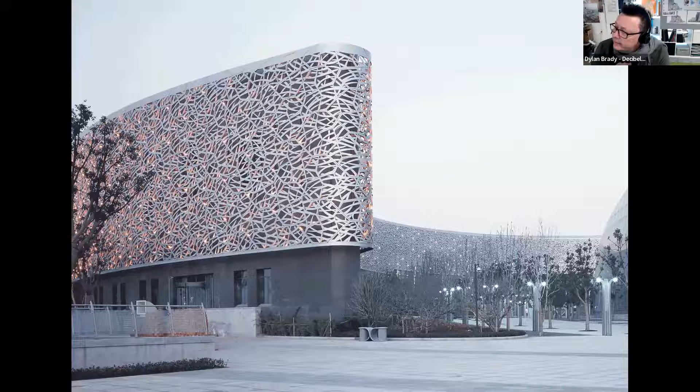Nick and Virginia have spoken very highly of quite a lot of the projects that we've done through China over the years. We started working in China in 2008, and in 2008 we won in an international competition the facade for the new Suzhou Science and Cultural Arts Centre. I'm not going to go into very much detail on any of the previous projects other than to give you a little bit of context around perhaps the shifting emphasis of international design and its role in China and the way it works.

We started in China very much on a hyper aesthetic kind of super rationalized cultural brand, if you will, creating identity, creating places, differentiating cities that could otherwise be lost in a homogeneity. And this Suzhou Science and Cultural Arts Centre really set the bar for us and for a number of other projects around creation of an identity using a very simple but detailed and complex relationship between patterns and lines.

Our team here at Decibel is deeply multicultural. We hark from not only Southeast Asia but Europe and beyond, and we work together in a building that we were lucky enough to design for some future person who would be highly blessed. This is the Pixel building that I'm in today and that we use as our headquarters. It's located in Melbourne, and it was built and designed in 2006, completed in 2009. It's a demonstration green building, and we're getting quite good at doing these.

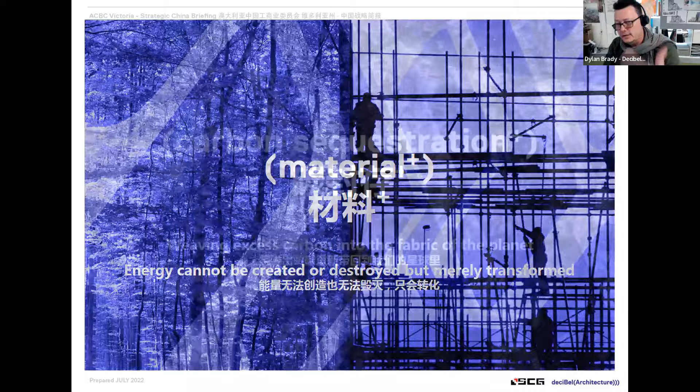And then obviously this idea of sequestration or embodiment. How do we make sure that we weave the excess carbon that's currently in the air back into the fabric of the planet? How can we actually own it and control it and take it out of circulation from the parts per million? And then of course, people. We are all people in nature, and it's the nature of people that sometimes really pushes us.

As with all projects that we've done in China, you go through a lot of versions. There's a lot of minds to keep happy. There's a lot of agendas at play. I'm going to show you now a slide that takes you very quickly through the panoply of opportunities and options we went through. But remember, inside each one of these versions is actually exactly the same engineering and parti of architecture.

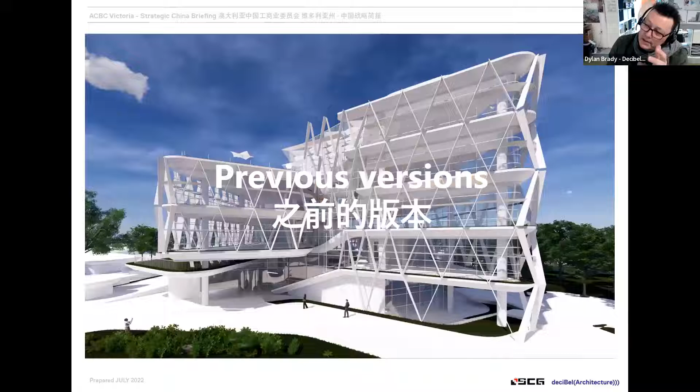So in these previous versions here, you see that there was a competition, a version, another one, all these different opportunities looked into and studied in order to come to a place where we felt that the client was finally at a point where we could get the government and the planning authorities over the line.

We have workers coming to the building, we have visitors, we're using energy, we're using water, we're pushing water out. Our idea was, if we could think about this project as a part of the context and not as a single site, we would be able to better explore and explain how the urban design principles that are very well understood in China, like linear parks and connectivity between areas and identities, could be woven into the story of this building.

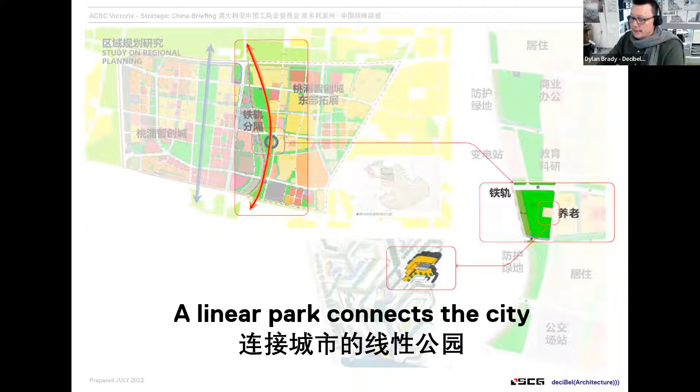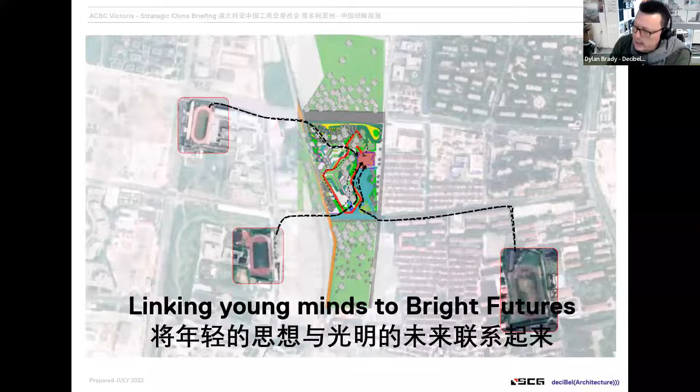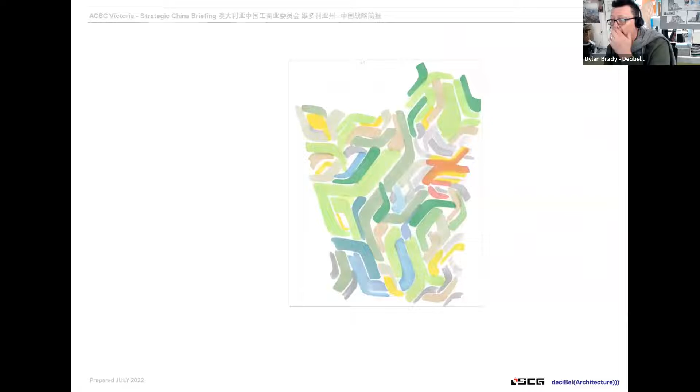So this idea of ecological complexity, of this woven landscape, and of coming back to these ideas of journeys was really something that drove us to think about this as almost a painted landscape. And there's thousands and thousands of years of tradition of incredible gardens and journeys and quite highly structured landscape metaphors and allegories that are in the Chinese mind and in the Chinese history. Suzhou, where we did that original project in China, has 98% of the World Heritage List of gardens in the world inside this tiny city.

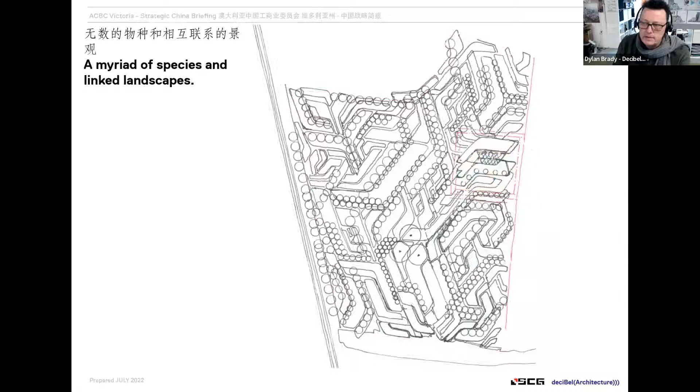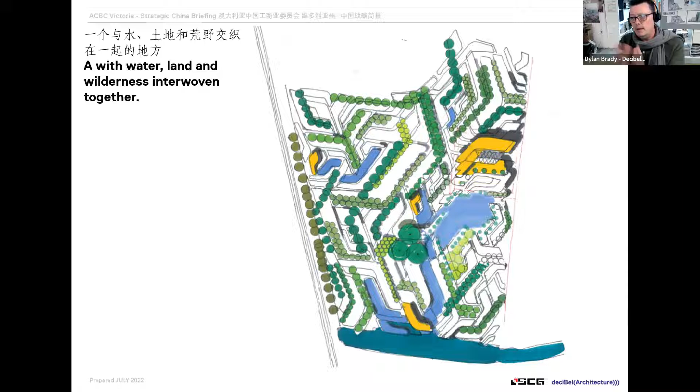For us, that painted landscape really drove us to thinking about how do we create this interwoven, overlapped, and ultimately living ecology that would be inspired by the scale and the journeys of those Chinese gardens, that we could bring a myriad of species and linked landscapes together. So with water, with land, with wilderness, with farmland, with cultivated and wild planting, we'd be able to draw together really an overall strategy. And we thought about our project, this larger project here, as being simply an enhancement or a focused expression of what we were doing there.

At each stage, when you're working in projects like this in China, you need to make sure that your idea can become the client's idea. You have to be able to translate that idea in a way that ownership of that idea transfers, and that takes courage. You need to be ready to let your idea go, to let other people participate in it and actually understand how it's going to grow.

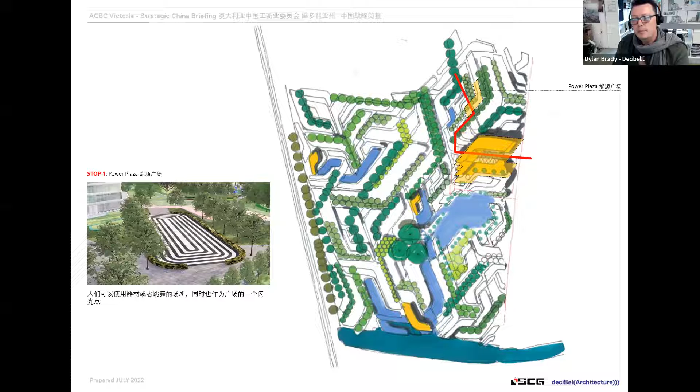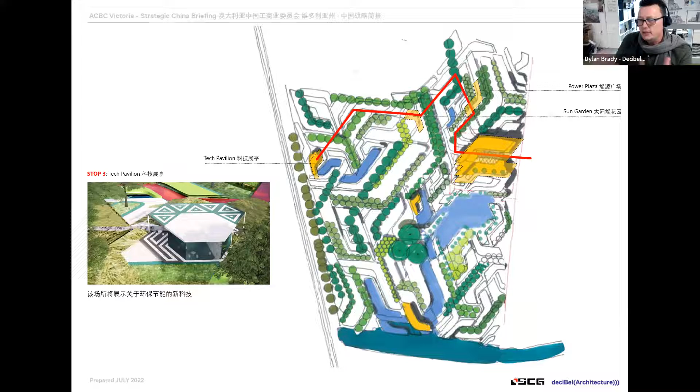So we imagined here a simple loop through this park that would let us bring people through a series of 7 pavilions. There was a power plaza where we were going to be able to tell children, dignitaries, family members the story of energy and solar power. A sun garden that then looked directly at solar power rather than necessarily geothermals and hydropowers and the like. We're looking then at a tech pavilion. How do we utilize data? How do we gain data? How do we measure the data from this park and the filtration of water that's going on inside it?

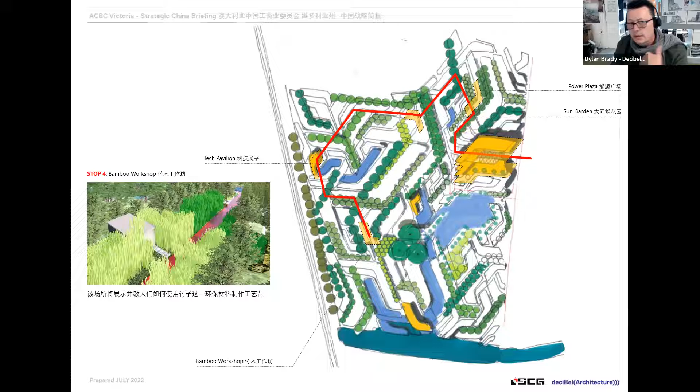A bamboo workshop. Bamboo is one of the most incredible rapidly renewable materials. It has a deep, deep history in China. There's a massive amount of it in the cultural and construction industry over there, and far from seeing it as an olden day tool or material, like that unsophisticated bamboo scaffolding, we were really pushing to see how we could use those older, rapidly renewable materials, the crafts that we used with them, with the current CAM cutting and digital technology of lamination and material sciences, to make sure that bamboo has a role in the future.

A water resilience garden. We had the great opportunity. This site and this park is located along the Honglei River. Now, river is what it's called. Drain is what it looks like. Our job here and the function of this whole park and project is ultimately to clean that waterway. So we take water out of that waterway and we push it through all of our reed bed filtration gardens and put clean water back into the river, and we explore and explain and educate people about how that works as we go through it.

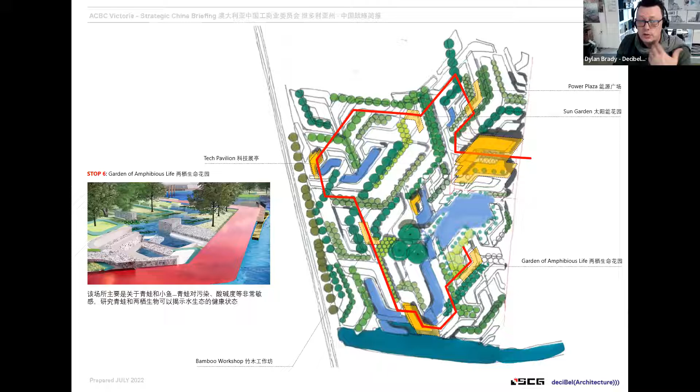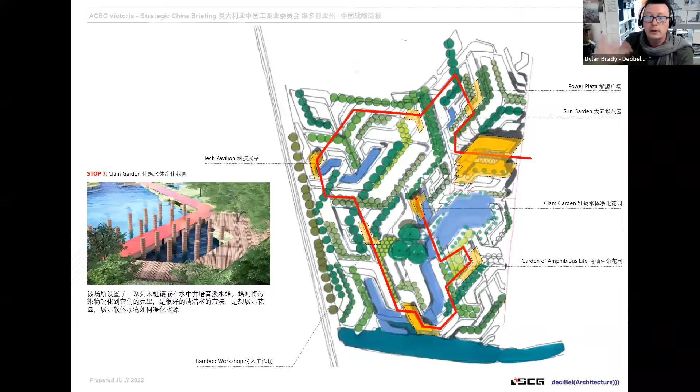That water story leads to a story for a garden of amphibious life, where we start to talk about frogs, and we talk about all of the creatures that live in water and how they live in water and how that psychology and ecology works, and actually train people to stop thinking about water as a drain and start thinking about it as a haven. And from a haven of aquatic life, we wanted to put in a clam garden where we actually had a productive garden growing clams that were doing two things. They're both filtering water and they're also providing a food source, if not for people, then for the environment and for birds and other creatures in the space. And ultimately leading through to our building as the world's greenest building.

Pixel has got 105 points out of a possible 110 in LEED. This building has been designed at this stage to achieve 108 points in LEED version 4. WELL version 2, 100 points, and I don't want to get too deep into the detail here because I don't know how many of you are au fait with all of this, but I can assure you there are thousands and thousands of pages of this stuff, and most of it would make your eyes water.

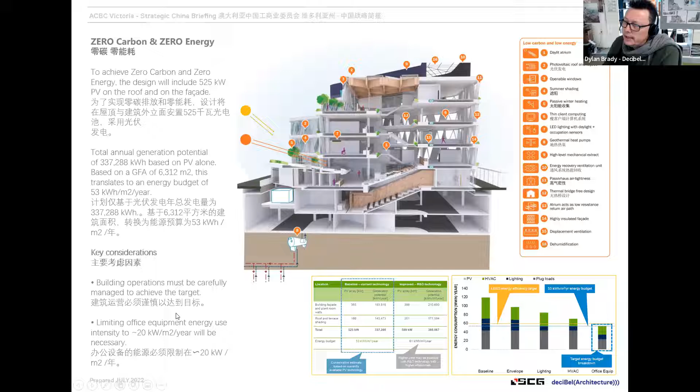So in order to work to an energy budget, you have to make sure that you're essentially trying to understand how you're managing the energy use on site, and obviously tailoring it to that. And I'll get into a little bit of that in a minute. Zero water is a critical element there. Zero water here being, we wanted to be able to harvest rainwater captured purely on our building to fund our building. We've done it here in the Pixel building, on a very, very tiny site.

We're at about a 240 odd square meter site here, and we've got more like a 1,000 square meter site there. It's about making sure that you catch as much as you can, but that you use as little as possible, so we're using vacuum toilet systems. We're using a lot of grey water treatment systems. We're returning water, as we have to in quite a few of the rating tools, to the environment cleaner than when it landed on our building, and lots of measurements and water consumption strategies. It affects the way that you use your energy systems, because you don't use water in your cooling towers.

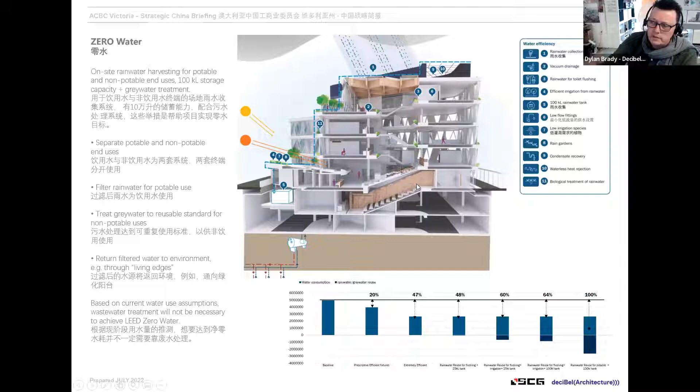You need to use air chillers rather than water chillers, and there's a lot of kind of components to that. But a big part of it is also making those stories visible to the occupants in the project.

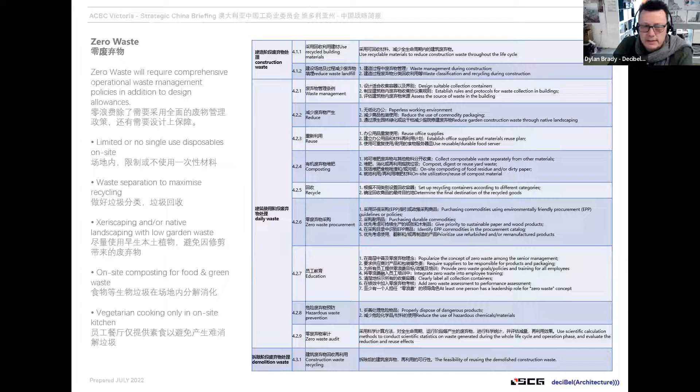Zero waste. Zero waste, I think, is a tool that has quite a lot of room to grow. It's still very much about making sure that you send what you don't use to the right places to be reused. We've really tried to make sure that the building and the construction company that is building it understands that we need to offsite as much as we can, so that that control on waste is much more sophisticated.

Absolutely having no idea how long we're into this, but probably needing to get a bit of a wriggle on.

This is a view of the building. It's developed a little bit from here because, you know, these things happen, but this is what we've got approval to share at the moment. And so you can see that this building has got a series of quite articulated triangles on the facade, and I'm going to talk about the facade a little bit here because it's such an important part, both visually and also at an energy and information level.

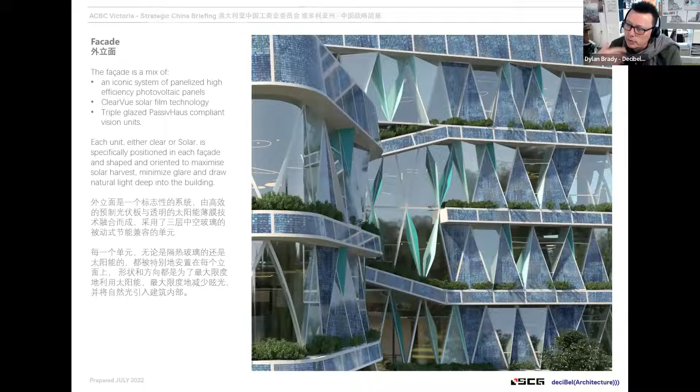The facade is really a mix of solar panel elements built into these triangular frames, of triple glazed window units, essentially ensuring that we have a clear thermal line to the project. And we've, in those clear units, included a ClearVue film, which is a solar film generation, trying to obviously test and explore the technologies that exist today and push them to the limits of where we can go.

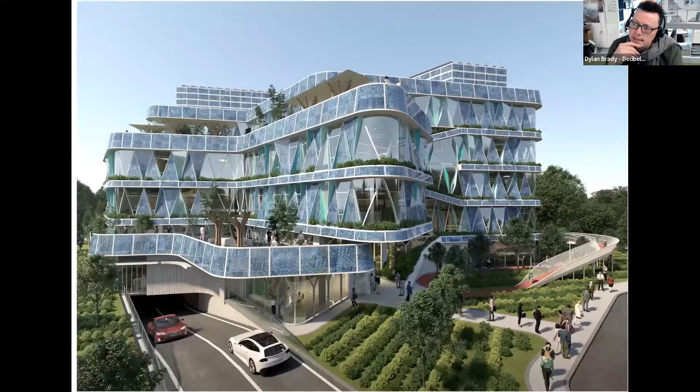What's interesting in the facade is that there's a series of competing requirements. We know that we need to maximize the solar energy that we're gaining off that facade, but we also, in order to score all of the points that we have on indoor air quality and indoor environmental quality, need to maximize the daylight penetration into the project and into the building, and also maintain connection to nature and views to the outside.

And so what we did was, in generating this idea of the triangular facade, we were able to make sure that the upper elements, the triangles that have their base at the top with their peak at the bottom, were all dedicated to daylight, and that the triangles with their larger section at the bottom and the peak at the top were all dedicated to solar. And we were then orientating those so that we would harvest and capture the maximum amount of light possible.

We had very strict controls on our window to wall ratio, and that obviously drove some efficiency and some need for solar and daylight performance. But what we found overall is that there were a number of panels that started to perform really substantially better than other panels in their orientations.

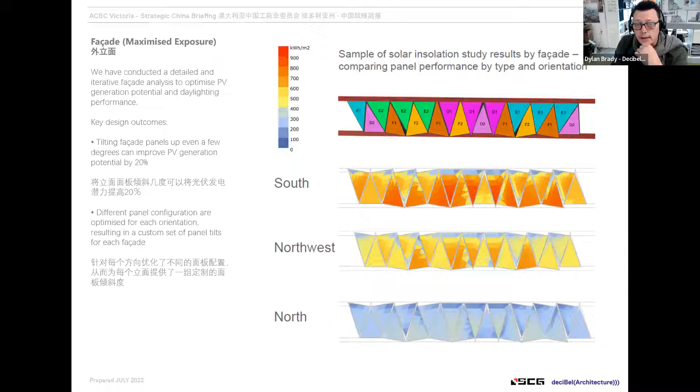Obviously, to the north, sun coming from the south, there was not a lot of solar power gained, but we found that even a slight inclination, due to what was essentially a very white sky and a very bright sky, led us to actually generate a reasonably substantial proportion of our energy from that section of the facade.

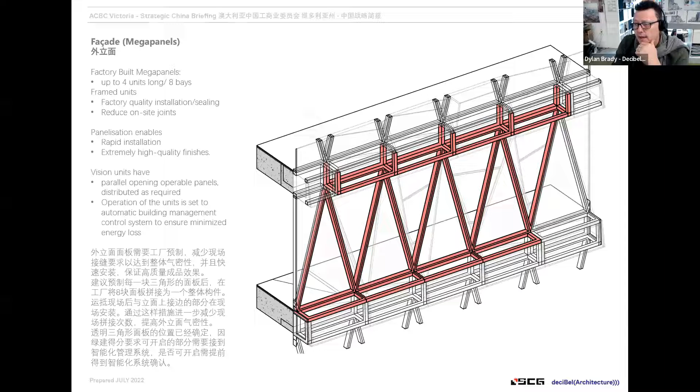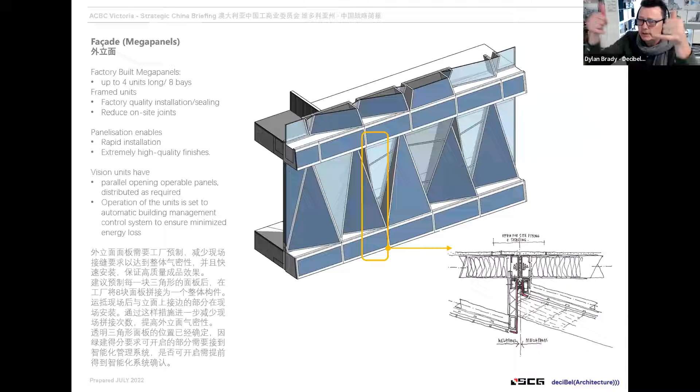We originally designed these elements to be fabricated potentially in a steel section, and we pushed that forward and got that into a cross-laminated bamboo profile. But these are the shapes of those panels and mega panels, everything fabricated off-site, fully sealed, and delivered and offered up onto the building in its full capacity.

And you can see here these living edge garden planters that sit at the bottom of each of these elements that are both for our grey water recycling system and also for the creation of microclimates to keep our solar panels cool, to keep birds and insects fed and to essentially improve the indoor quality. Here in the Pixel building, one of the things we like the most is that all the way around the outside of our office at our floor is a garden bed that has birds and ponds and rocks and all sorts of native grasses growing in that strategy.

So we spent a significant amount of time, well over and above the part for which we were being paid, in a kind of an R&D exploration with the Shanghai Construction Group and their facade delivery team as to how we would modify, modulate, prefabricate, and bring these panels to site so that we could massively reduce the amount of CO2 embedment, massively improve the performance, and absolutely reduce the on-site installation time that we took these panels through.

There are a number of kind of key panels. There's a full height fixed vision.

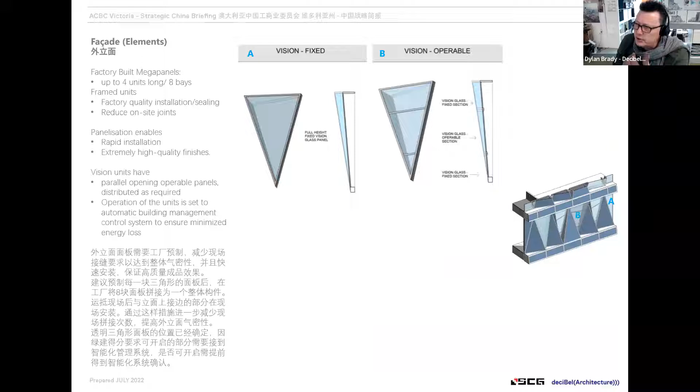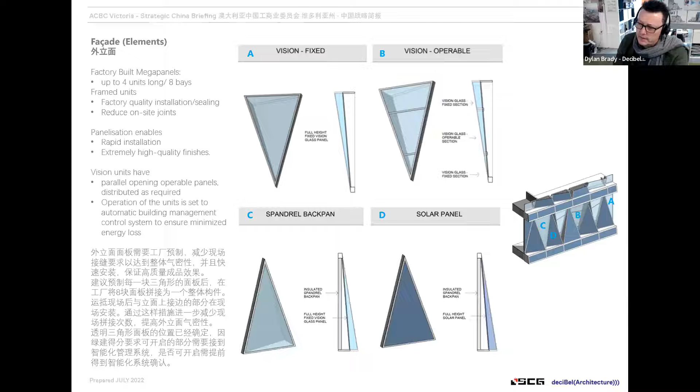There was then a vision glass that had an operable portion to it. And then there was a spandrel panel that had a back pan and our ClearVue solar on that. And then obviously an insulated solid solar panel.

When you look at how all of these work together, this kind of natural ventilation that you also are required to have, we first investigated this through the window itself, because there was a very funny rule in one of the Chinese codes that presumed historically that ventilation would come through windows. And so we had to spend quite a substantial amount of time, and this is probably true of a lot of components in the project, really drilling into the definitions of what the codes were asking us to do.

For example, you can have ventilation into a building through a non-glazed opening and it's still air from the outside, but the theory and the perception of it being air from the outside because it was coming through a window that you could see was open was something we spent a lot of time, I'll say it, arguing about, because obviously opening a window in a passive house building and bringing in all of the pollutants and the dust and the smell and the noise and also the humidity actually generated energy increases in the building, not energy decreases.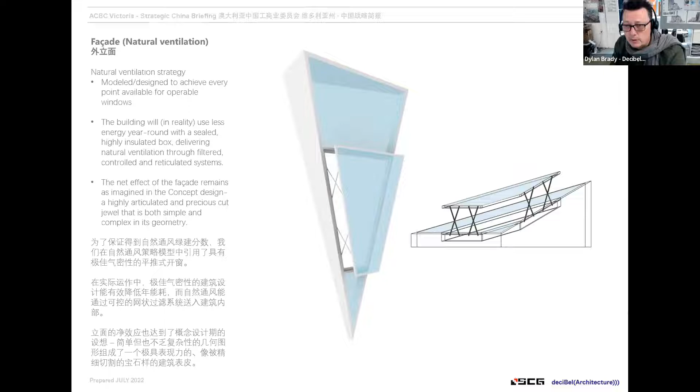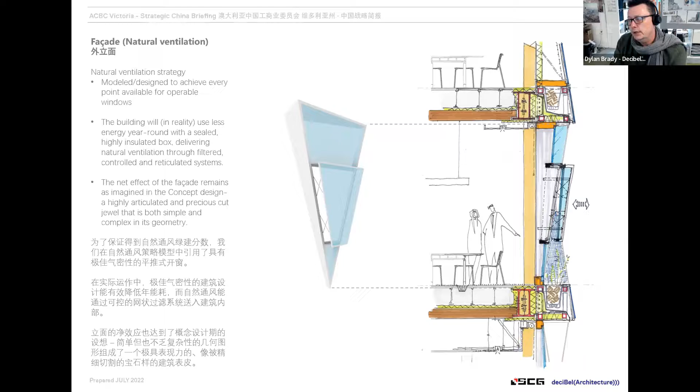And when we did a massive study on the right temperature and right humidity, Shanghai only seemed to sit in that world for about an hour and a half a year, where you could open the windows cleanly, there'd be no fire outside, the smoke would be gone, it would be better. We, of course, had to concede that that would hopefully be changing in the future. We weren't saying that it was going to get worse in the future, it was going to get better, but we still did have to go through the energy studies on how this energy system would work in the facade if we were to break that facade and bring natural ventilation through there.

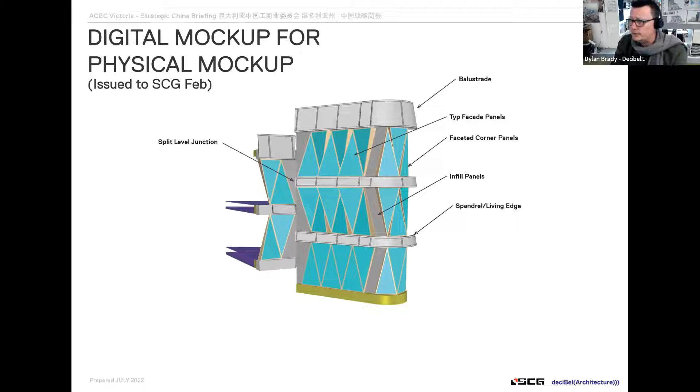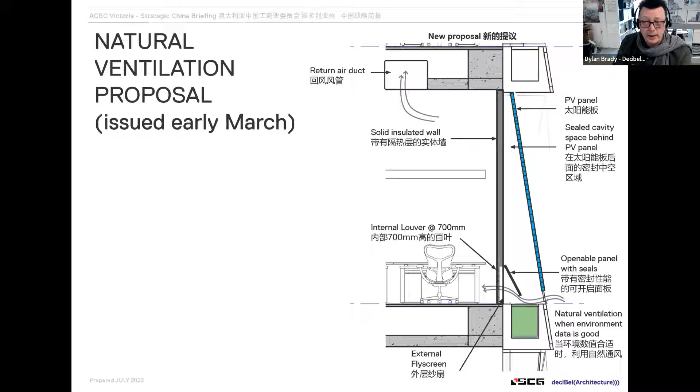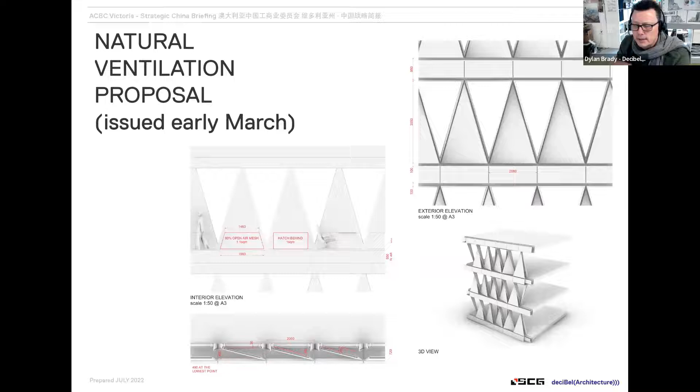And it could be automated by the building, so that when the temperatures were right and the humidities were right, those elements could be opened and operated, and looking at how much open area we would get through that, and running CFD analysis on those proposals, refining products and colors, looking at some higher efficiency solar, looking at some blue solars, and then ultimately doing a services study to understand what the installation was like on each of these components.

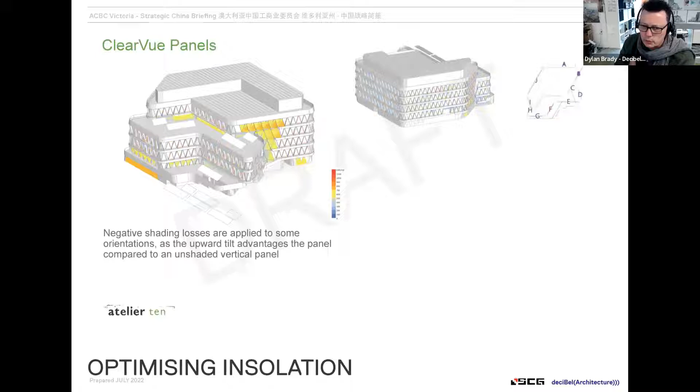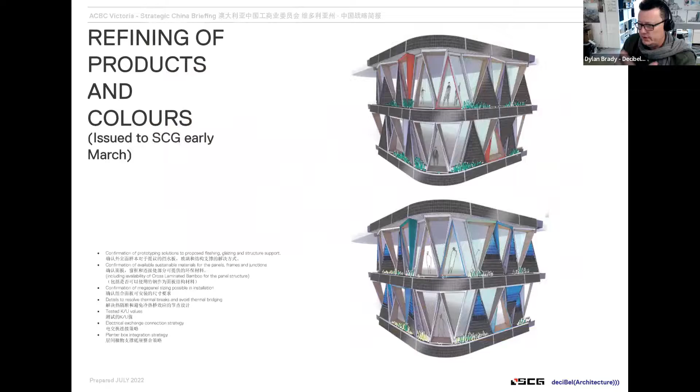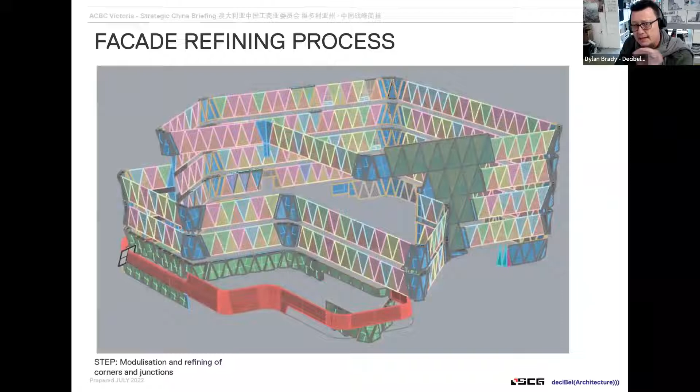So essentially backing up our energy budget by displaying all of the tools that we'd used to really explore and explain how much solar we were getting from each of these particular components across the project. And then obviously looking at what's the net effect, what's it looking like, and are we in the ballpark on systems and on types. We managed to get this down to about 4 kinds of facade element that we could assemble into our mega panels, and so there was some real efficiency that was realized in that in the factory timing.

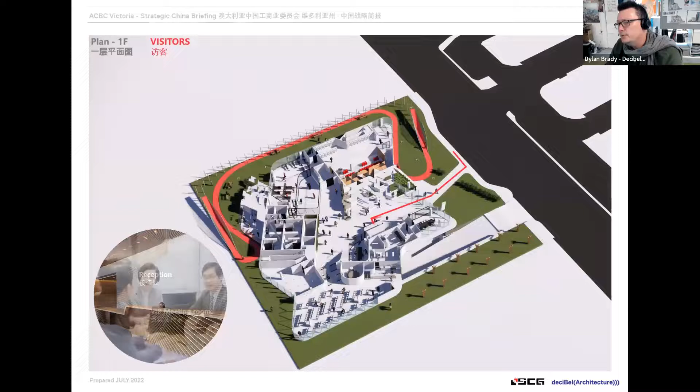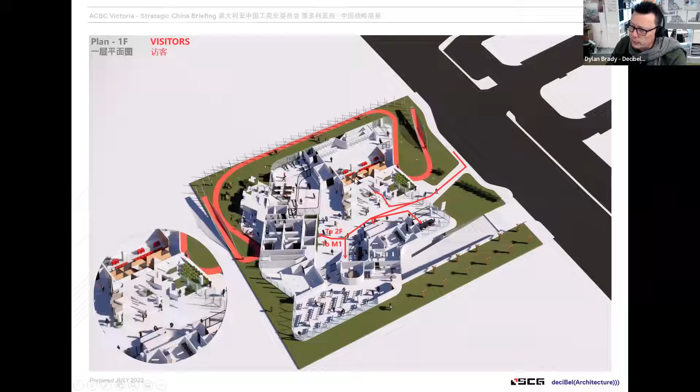So to take you back down to the ground, obviously visitors, reception, VIP meeting rooms, being able to make sure that everyone's journey is really easily navigable to elevators, to the M1 terraces, up through our Tangram terrace that takes us on a bit of a discovery journey. This Tangram terrace is really a space for gathering and for groups to have photographs, but it's also full of the data screens telling everybody about what's happening in the building as part of that educational journey. This is both point 1 and point 7 when you go out through the park.

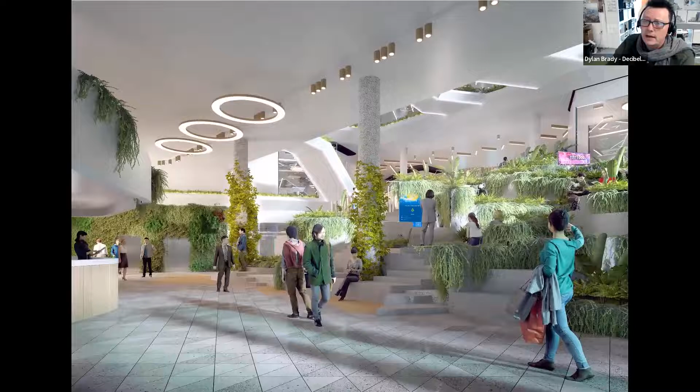Everybody comes to the building, they walk up that Tangram terrace, and then at level 2 there's a series of kind of interactive education spaces before you go out the rear door here and down the landscape and out into the park.

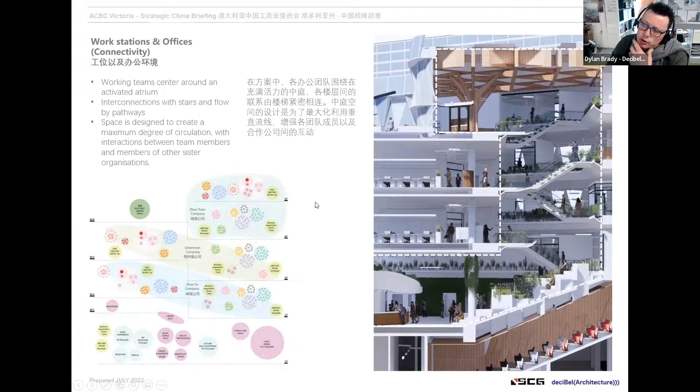So workstations and office connectivity, as we were describing before through this atrium. We had just finished doing the interior fit out for John Holland here in Melbourne for their new headquarters. Obviously now it's owned by CCCC, the Chinese company as well. And we did a lot of working groups with them to understand how we could do the org charts and the network charts between what was ultimately the 3 organizations that were going to be tenanting this building.

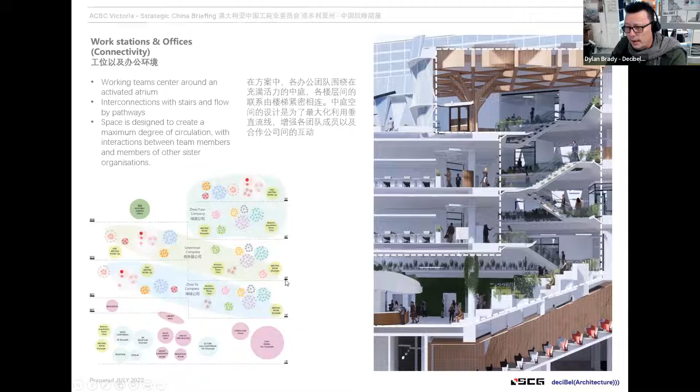And so we worked out how we could get those organizations distributed across this atrium so that we could really get everybody not using the elevators, which is a part of the challenge of good design, but rather taking this kind of continuous circular looping journey down through this atrium, through the main staircases that lead you and connect you up and down.

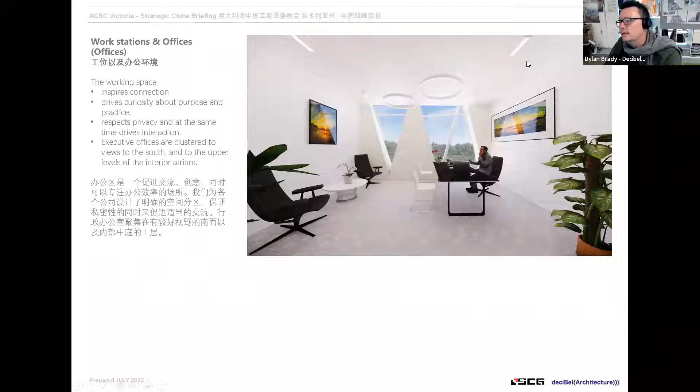This atrium also works as the main thermal exhaust for the whole building so that we can recirculate the air, take out the heat through the heat exchangers at the top, or the cools, and send that back into the supply air.

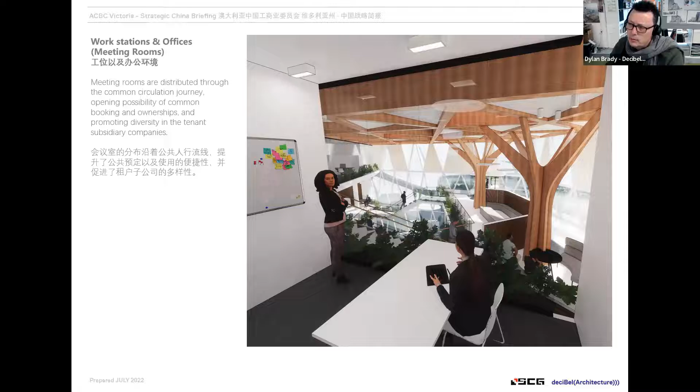So obviously working spaces, offices, the executive offices, and really sophisticated, sustainable locating of meeting rooms and breakout spaces so that we could build that flexibility in, because we don't want lots of cellular offices and we don't want all open plan offices. We need a really interesting hybrid mix of these kind of bookable spaces that engage with the communities that you are building into the walkarounds of.

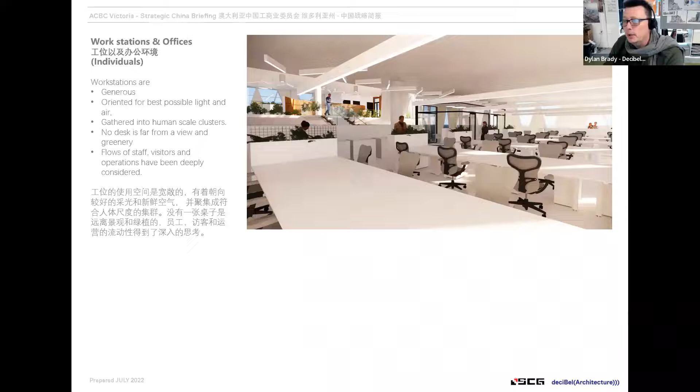Choosing great furniture is always important, and there's some fantastic opportunities in furniture and the fit out that's been delivered more and more because of the demand for high rated buildings. And I know that any designers out there will know that, you know, vegan leather and super sophisticated recycled materials, and even like carpet, Interface, another great Australian company, has managed to push itself into carbon positivity by setting a target for carbon neutrality and recycling all of their old carpets and coming back and maintaining a supply chain command across elements is really good.

I'm going to keep going pretty fast. This is one of the library spaces in the building, it's at that level 2 mezzanine. It's designed very much as this kind of not just a cafe library space where staff and their visitors can come and gather and relax and, you know, kind of detox a little if you want in between working sessions.

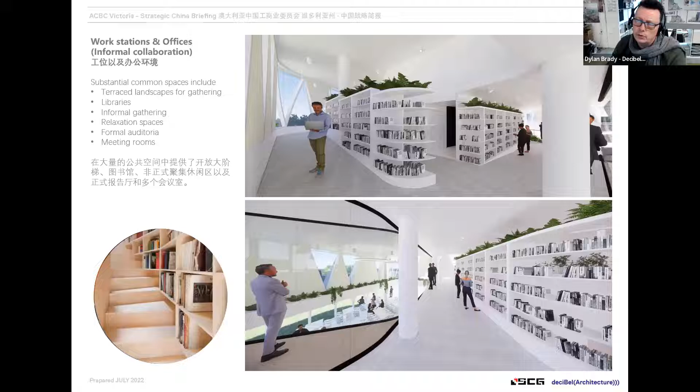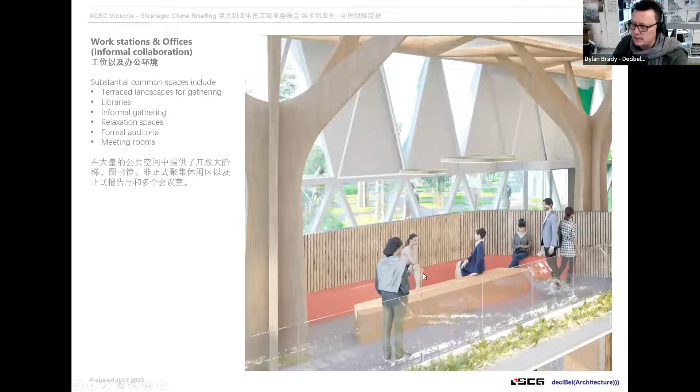And it's extremely required in the Chinese working culture to authorize and empower staff to take those moments out. Creating meeting rooms that feel like they're informal, that they're relaxation spaces, that they're connected to gardens and not simply to the tasks of work is actually really important to break down that kind of rigidity that can come to bear on some offices. Some focused booths and helping the client understand that furniture strategies are not just about finding one chair and spreading it all around.

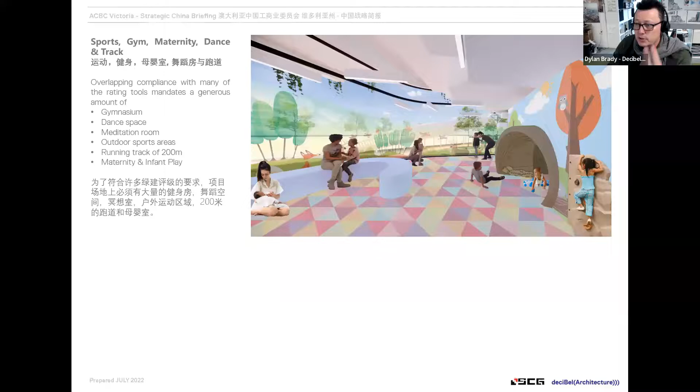We were required as part of the tools and the rating tool overlap to provide a plethora of amenity space to the offices. There's gymnasiums, there's dance spaces, meditation rooms, there's an outdoor sports track, there's running areas, and there's a maternity and infant playroom.

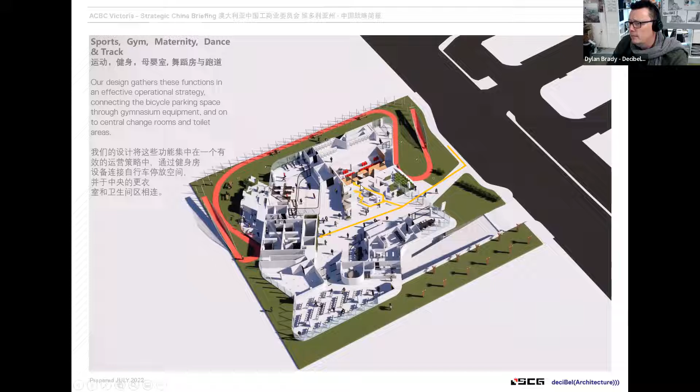So all of these areas have been built into a journey that is really designed to start as you arrive. We gathered all of those journeys from both the bicycle arrival and the visitor arrival to bring you in through the bicycle store and repair room, to take you then through into the gymnasium, to link to the dance room, and then come through into the change rooms, which are all obviously running off recycled and potable waters that have been gathered and harvested. There's green walls and green spaces across all of the elements.

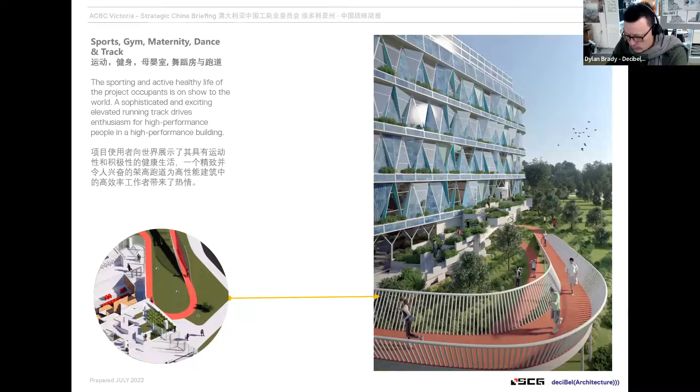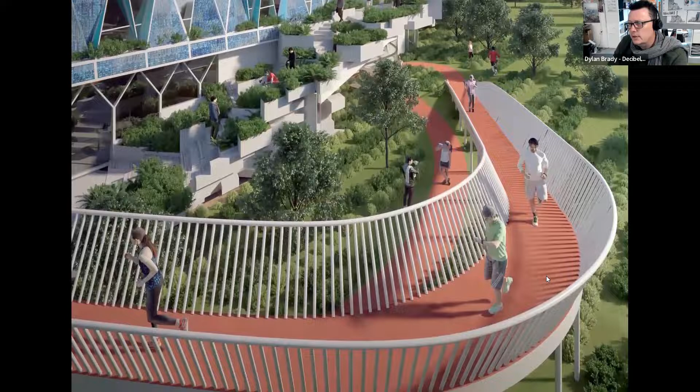Our running track was a challenge to get a 200 linear meter running track on the site without reducing our green area space. You always have these competing demands. And so what we did was we elevated the track up so that we could actually have it concurrently above itself, and thereby only lose the running track's width for approximately half of the running track rather than all of the running track. And so these spaces which are on the site but we have no fences for are still key components of making sure that we're achieving the livability and amenity outcomes that we're looking for.

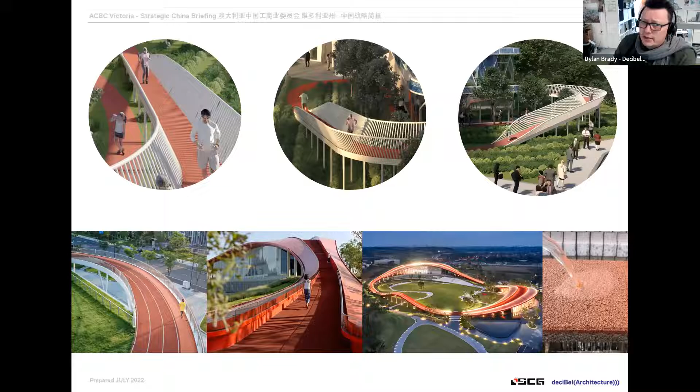And there are some great precedents, some particularly hoopy running tracks that this is in China. And so one of the things, if you're looking to try and change the rules in China, is find where in China it's been changed before, because that gives people great succor that there's a pathway and that there's hope for that innovation. Unlike Singapore, where innovation needs to have been done 5 times before, proven to make a profit and be ideally next to you, you can find opportunities from quite regional and disparate parts and blend those things together into comprehensive solutions that do more than any of those one parts might do by itself.

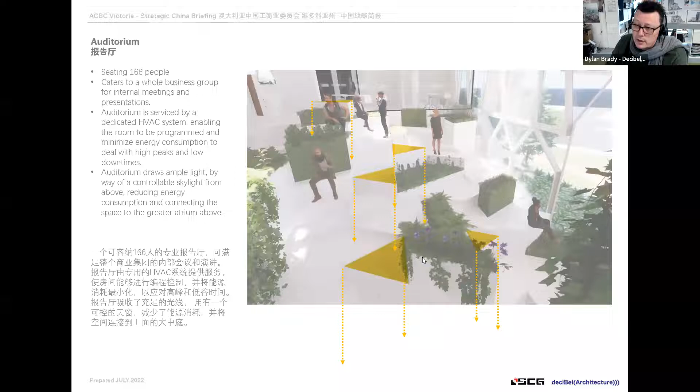So the things we do in there is we make sure that that auditorium is lit by way of skylights that come through the atrium above, and that provides ample light. There are controllable blinds in here, obviously, so that you can do projections.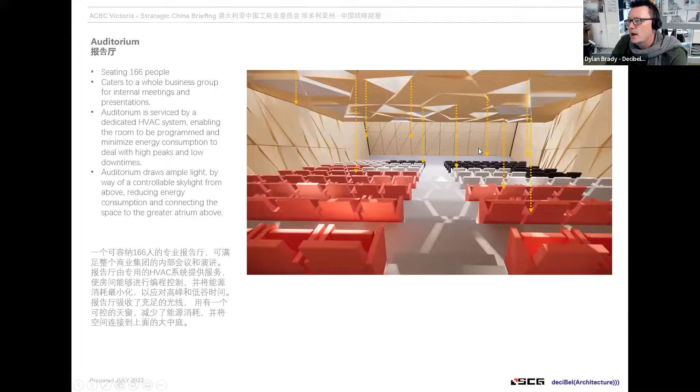The cafeteria is a double height space and actually was excised out of the passive house thermal line, because kitchens need massive exhaust systems going on them. We made this much more of a naturally ventilated space so that we could open the doors, we could have this space with an airlock control to the remainder of the office, so that the food smells and kitchen smells and cooking smells and ultimately quite a lot of noise didn't break into the main office building itself. And so you see there a sort of a

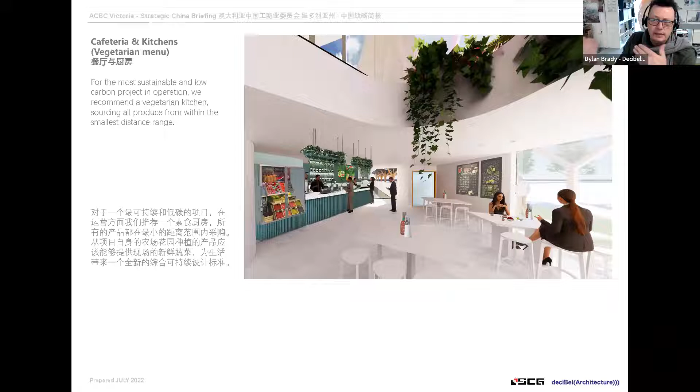marker here. One of the most interesting things about the kitchen space and the cafeteria was that we drove the client to really understand this kind of zero food miles. So zero food miles as a strategy is how can we grow as much as we need on the site, not only to feed our staff in a vegetarian kitchen, but perhaps to be able to accept some additional goods from the outside, or produce some preserves or chutneys or take-home meals so that staff could come here, contribute to the kitchen time, and actually take food back home to feed the family, or to do some of that componentry when you move into a surplus. So there's a really interesting cycle that we can start to connect people to.

And so our level 4 plan, as required in one of the codes, has about 250 square meters of vegetable productive garden beds that need to be grown and can be used as both educational opportunities, but also really, really functional vegetarian garden and food production spaces.

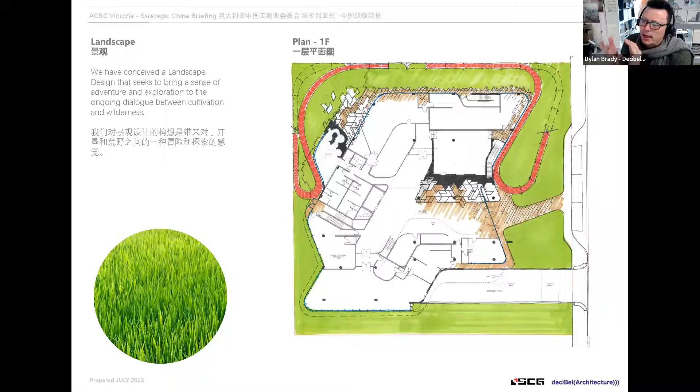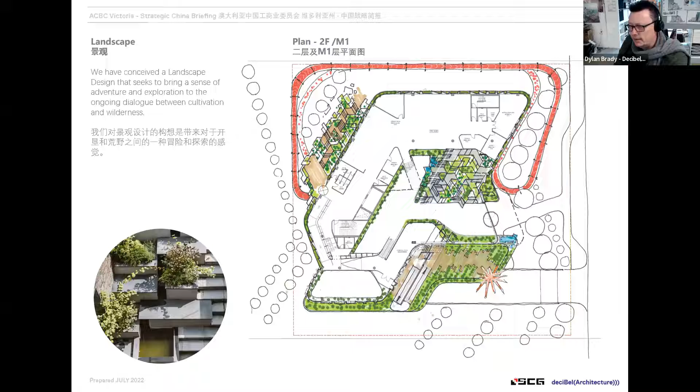That food strategy led us into an idea about the landscape, where we were really interested in trying to create a dialogue between the idea of cultivation and wilderness, and the landscape around our project, we wanted to really blur the boundary of the site with. And so what we started to do was create these kind of geometries that come back to that park geometry, where our landscapes start to drive you into an adventure of both geometry and planting and the performance of it. So our productive garden space that you see here at level 4 is quite a wildly planted component where the productive garden itself is planted like a wilderness. So we don't have rows of all the same vegetables. We actually have the productive garden all mixed up a bit.

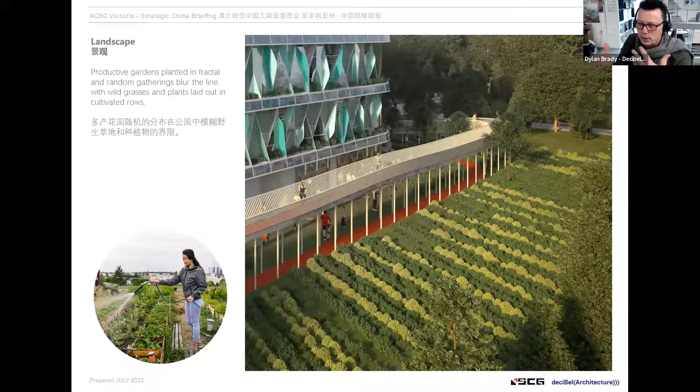And we then actually took the wild landscape, the grasses and the plants that are not productive, and we planted those in cultivated rows to try and make people reconceive of the idea that not only is this food, plants are food not just for humans. Plants are actually part of that ecological cycle and connect you to the world.

And so really, landscape is a thread that we tried to run through the whole project, where we're very interested in establishing the orientations of the architecture in the land and in the tree lines, as you saw from those early park describers, but also drawing that greenery into the building. And so the entirety of the atrium, including the stairs and the balcony edges and all of the balustrades, is planted both as a water filtration system, but also as a biophilia kind of connection, a linkage to what's going on.

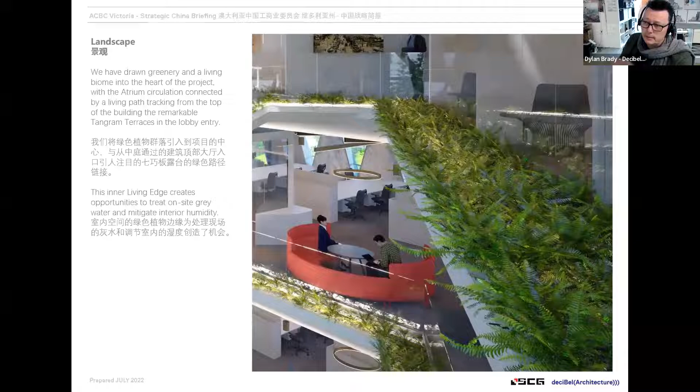And the plants that we intend to grow in here, seasonal plants, they go through changes. They're clearly indoor plants, but they're also in a nice big open environment and really link you into the building that you're going up and down through.

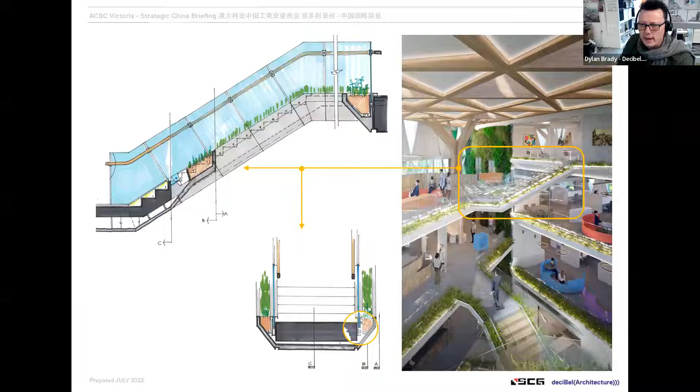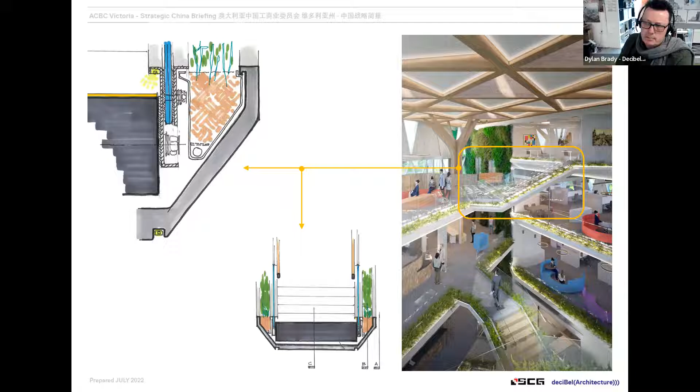You can see here some of the early sketch details on how those planter beds would be built up. We were very interested in using a GRC component that would be the exterior form there that we could offsite manufacture. The staircases, we went through a lot of R&D to build those staircases in cross-laminated timber using technologies that have been developed here in Victoria by XLAM and other great mass timber engineering companies, and really about minimizing the risk and maintenance on building these garden systems into the project.

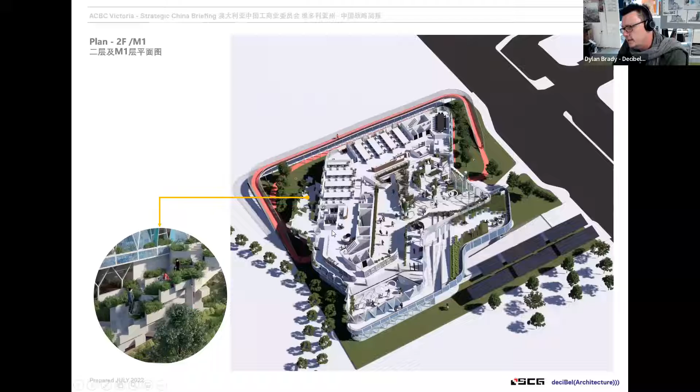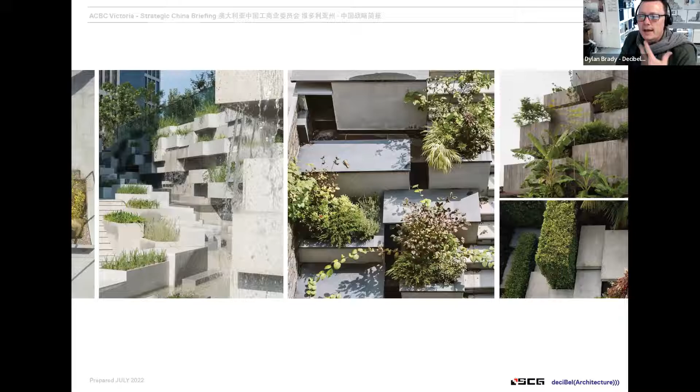And the Chinese, if they're good at anything, they're great at landscapes and gardens. The gardens in China, as I mentioned before, in Suzhou, they are some extraordinary spaces. And so being able to see these gardens as bringing sustainability, as bringing peace of mind, as bringing harmony into the workplace is really important for us.

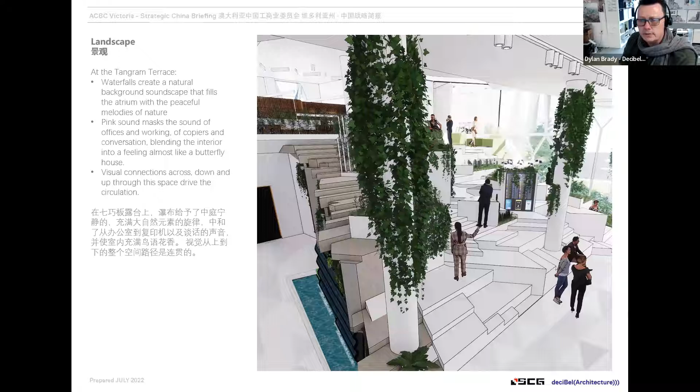So that tangram terrace has beside it here a series of waterfalls and pools, so that we fill this atrium with that white noise of softly falling water and trickling streams. These noises and these sounds are positive acoustic maskings that you can put up in order to perhaps hide the sound of the day-to-day business, the telephones and people talking. When you're in that space that has that kind of environmental audio sphere attached to it, you feel very different.

This tall space is also now obviously a space that we're very interested in building the most ecological kind of spaces. I would love nothing more than to be able to have butterflies in here flittering around and being part of the atmosphere and the life that we're working through. And the grand tradition of green walls, there's a lot of beautiful opportunities to do those projects.

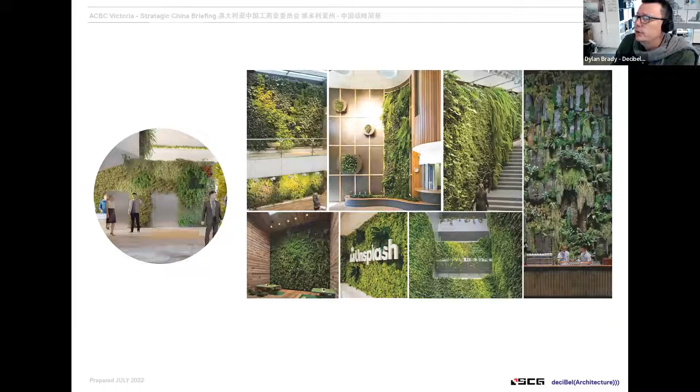So for us, this Zero Plus project really tries to represent a new way of building, of embedding technology, but even more of celebrating life in that challenging century. So we're pretty thrilled about the opportunity to have worked on and explored and done a lot of the R&D to make this real. And I guess I'm really open to questions now.

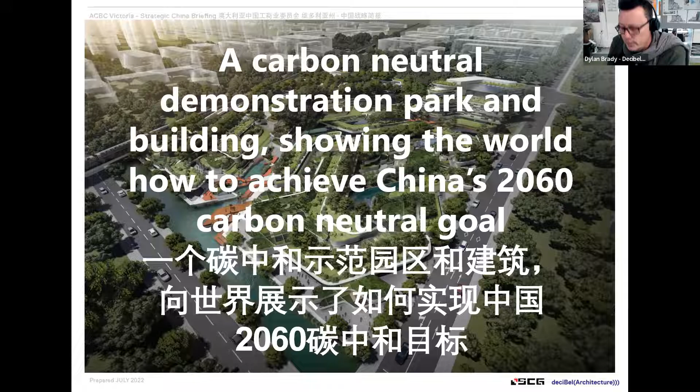Oh, Dylan, that's fantastic. We could have another half an hour of this. It's just absolutely enthralling, and I think all our people online would agree that the skill that you've displayed and the level of detail is really awe-inspiring. And the sensitivities that you display as well. And I think architectural diplomacy is something that's not really acknowledged. We talk about sports diplomacy and arts diplomacy, but this is an incredible bridge or platform for cultural exchange. So congratulations, it's just wonderful, a great presentation.

We're really running right up to the wire, but I have a couple of quick questions. Do you see collaborations in China on climate as an area of growth for your company? And this is from Anthony Coles, who's heading up our Green Channel initiative at ACBC.

Look, absolutely, massively. I think that there is such significant investment and momentum in China to change things. We have an opportunity to take everything that we've learned in our Western thinking to accelerate and help China leapfrog perhaps phases that we're still trying to get through. We here in Australia have worse planning and building and energy controls than they have available to them in China.